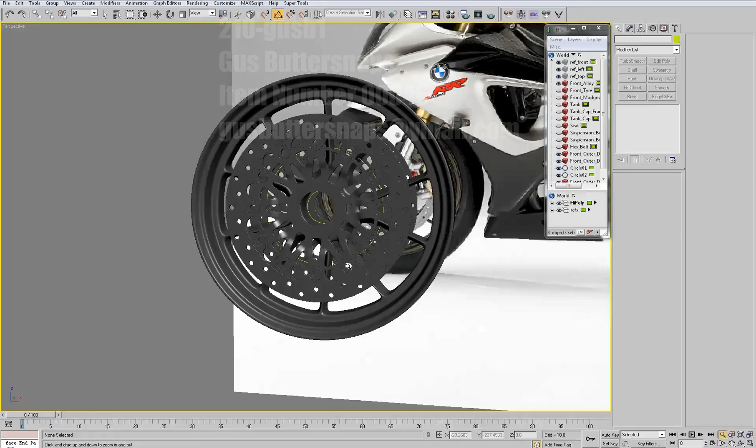I really wasn't entirely happy with the curve we put in this piece in the last section, so I'm just going to go back and do it a bit more to my liking. We'll take it back to the starting form that we had, so just delete everything but the original piece, and we'll use the symmetries again.

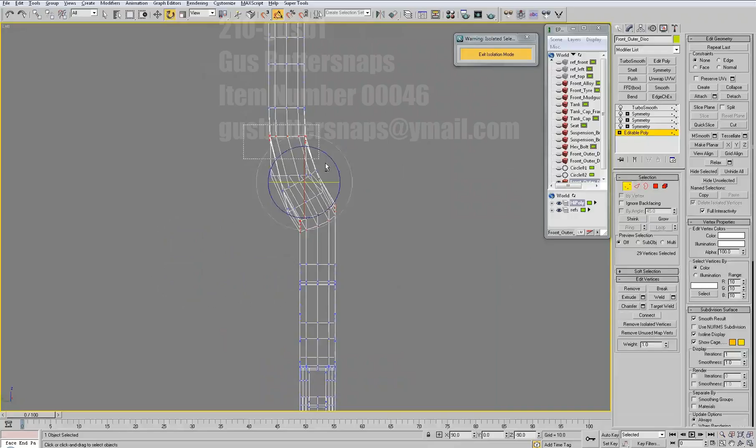Instead of trying to randomly guess the slant that we're putting on this, I'm just going to use a quick box as a reference. That way we know the slant that we make is perfectly straight.

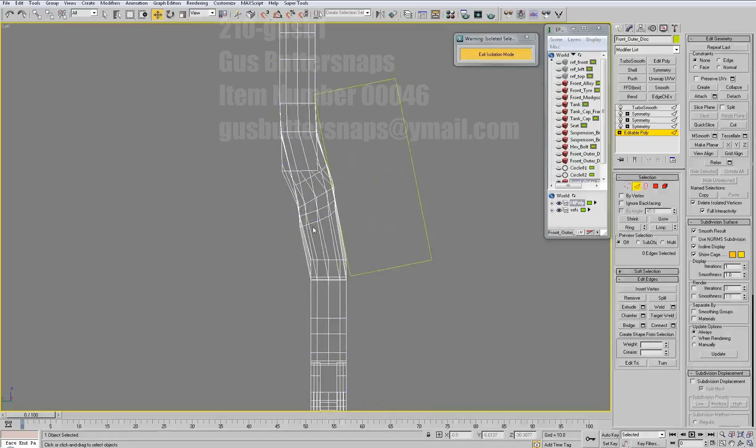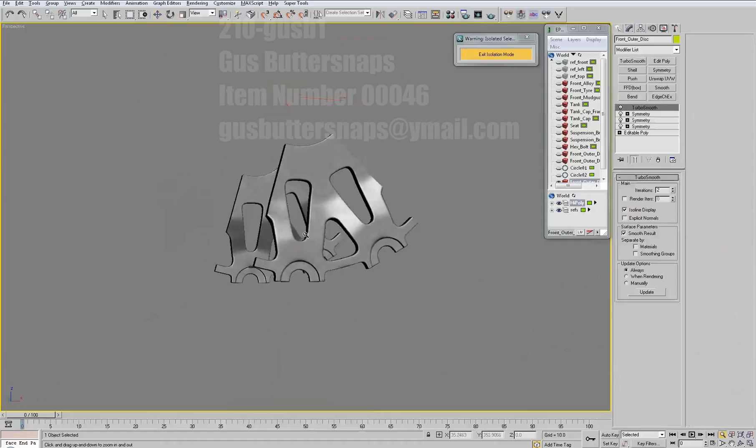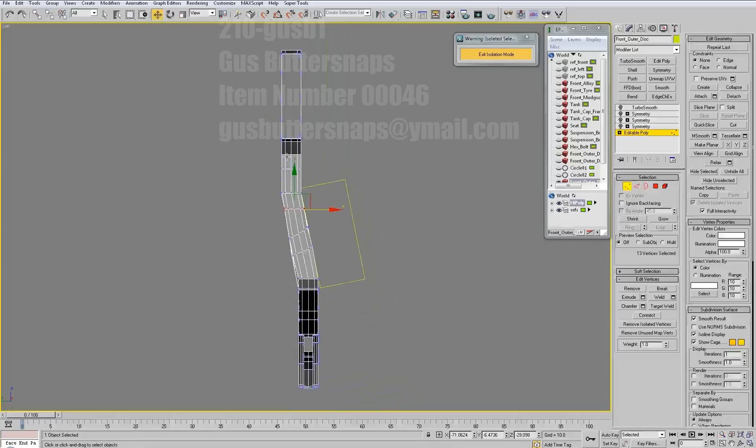Starting to look a little better, but still need a bit more work. Just gonna make this slant a bit deeper.

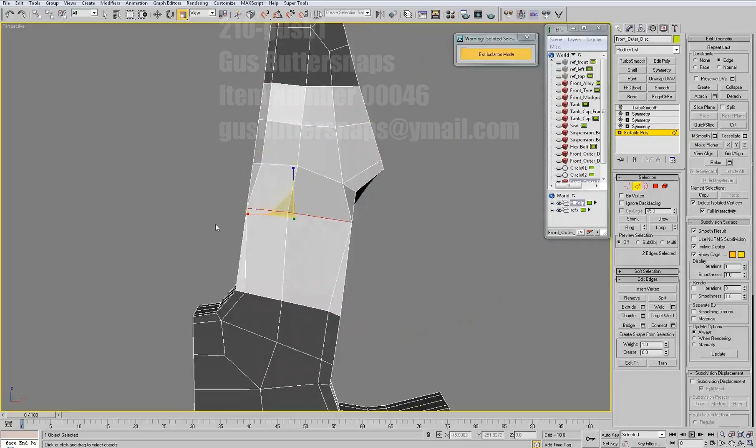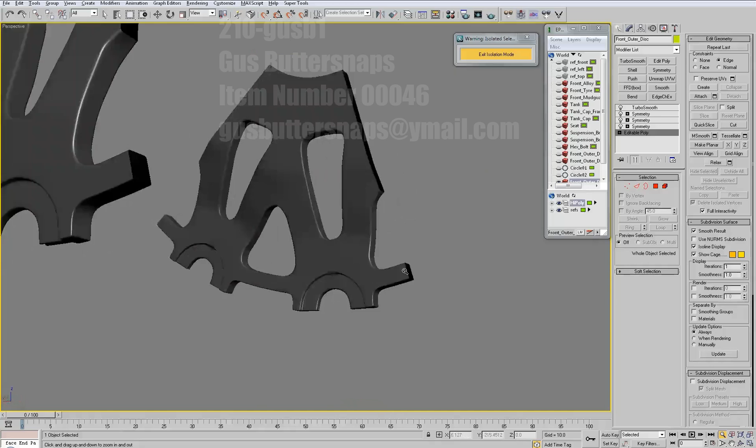Thinking about it, the easiest solution for this would probably be to delete the back faces, and then you can just work with a single plane. If you cut it off, you can probably just use a shell to do the thickness again, and then just weld it up. Obviously that didn't come across my mind while I was doing this, so we'll just go for this random approach. We get to the same point in the end, so it's just whatever works really.

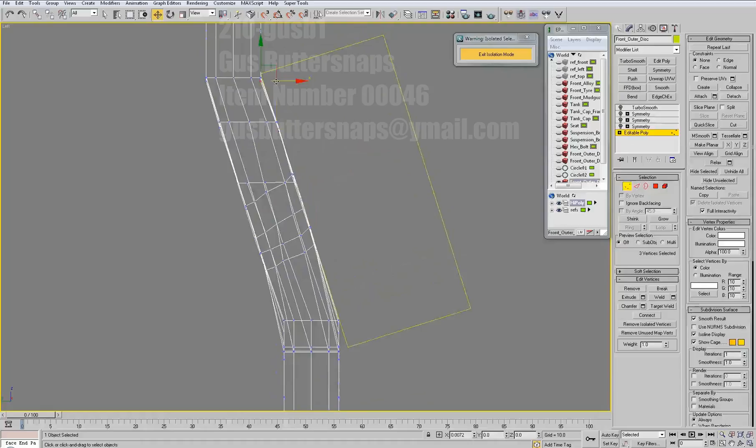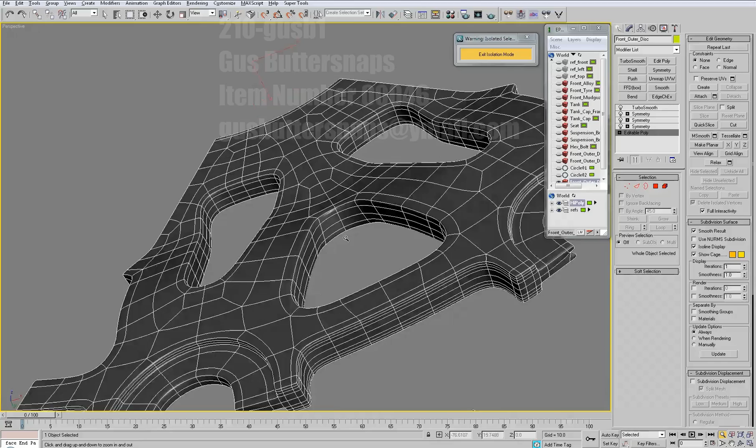It's looking a little better each time. Still a bit of a dip in the middle, which I need to try and sort out. I think I ended up going through pretty much every single method trying to flatten this little piece out.

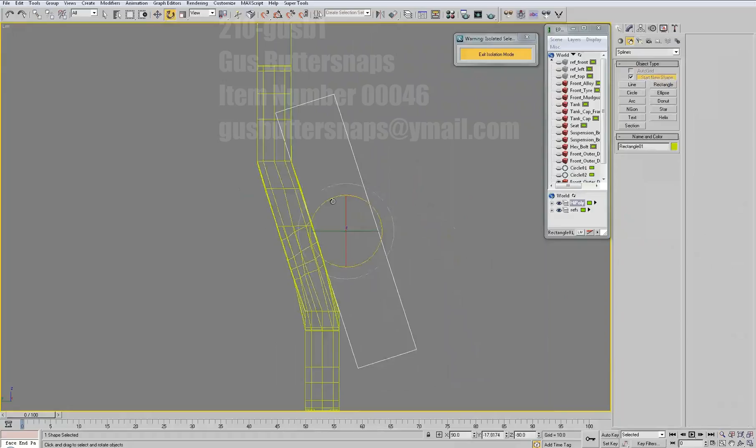I think with that dip I can just move the verts up in the middle and it would have sorted out, but for some reason we're just going to make the slope a bit longer.

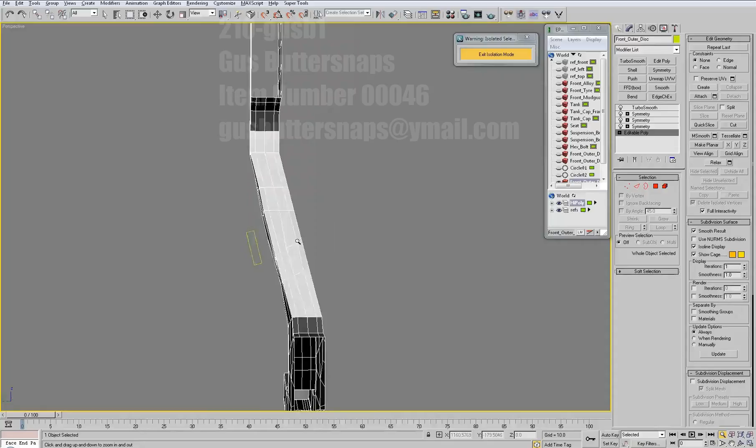So even if there wasn't a dip in the mesh like there is anyway, the way we chamfered that edge would have caused an error, even if it was flat. So basically curved off an edge right where the crease meets the bottom. So basically we're just going to chamfer for this piece to get the extra edge, and that way, by continuing the loops straight up, that should remove any problems that we should have.

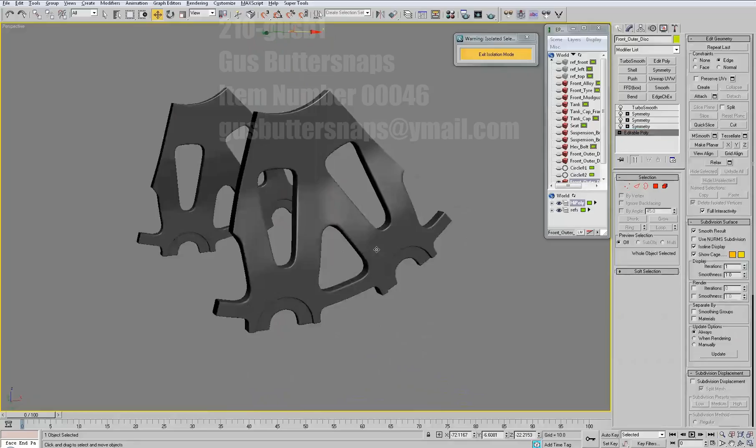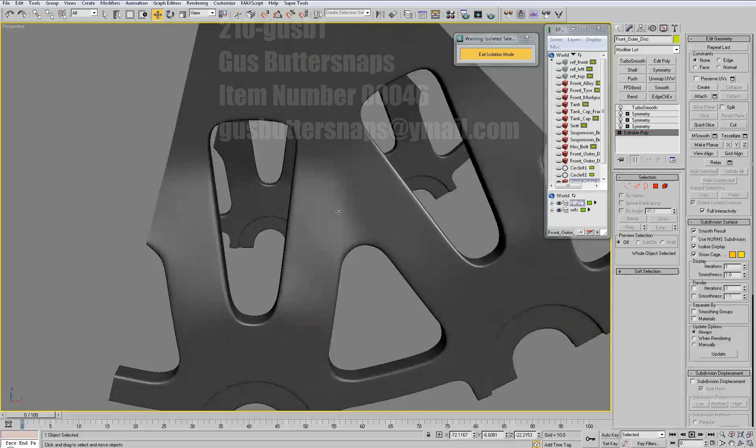There's still a little dent in the middle, which I was all kinds of confused by at the time. Whee! So we got there in the end.

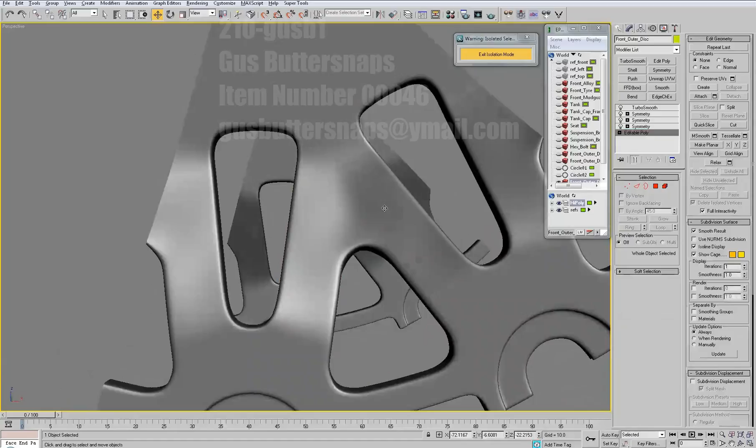There's a bit of skewing on the other side because of the angle we put these verts at as well, so we're just going to have to sort that out. Basically just more poly pushing until it's all smooth.

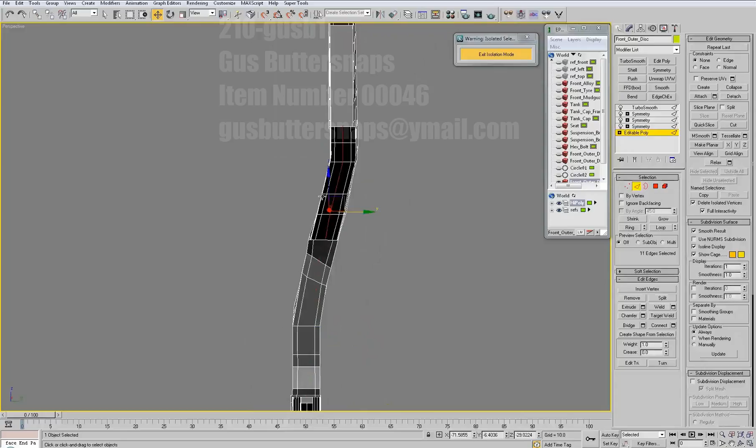Yeah, so we didn't have any edge loops at the bottom, but upon about to add in these, I realised the bottom's not even welded up. So we'll just fix this up.

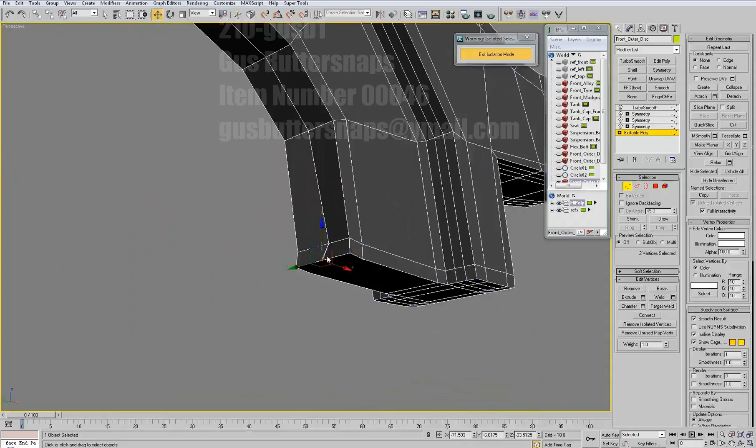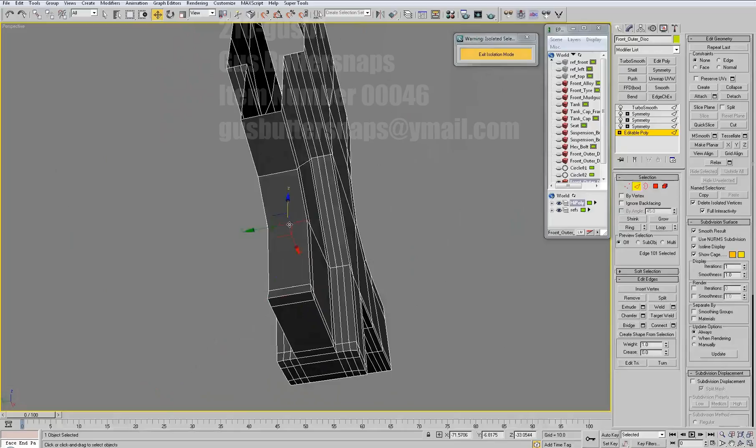So there's some all kinds of crazy twisted polys down there. Basically just selecting edges using bridge there, and we'll just add our loops back in.

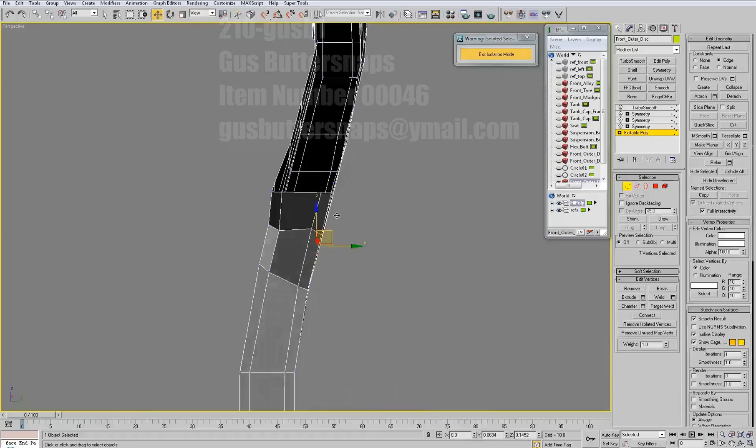To stop the slight distortion in the shape, we just need to line these up. So that will make sure the curve's the same on the front and back side of the piece.

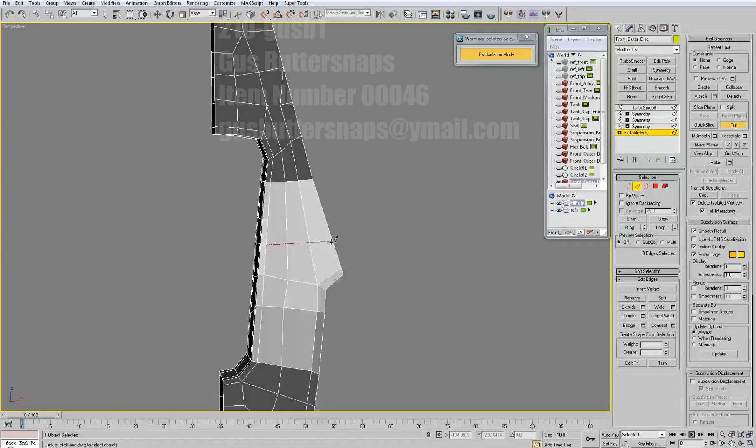By deleting the edge and putting back in, it should make sure that it's straight.

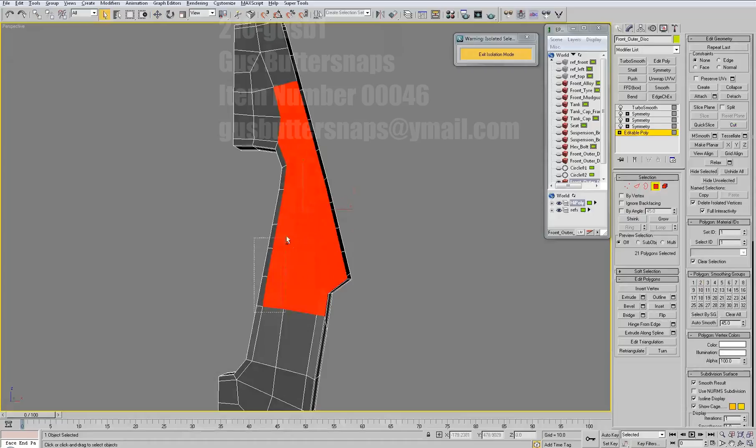Instead of redoing the topology on the back, we'll just use what we've already got. And we can just pull it back and weld it all up. Go back and do clone to element.

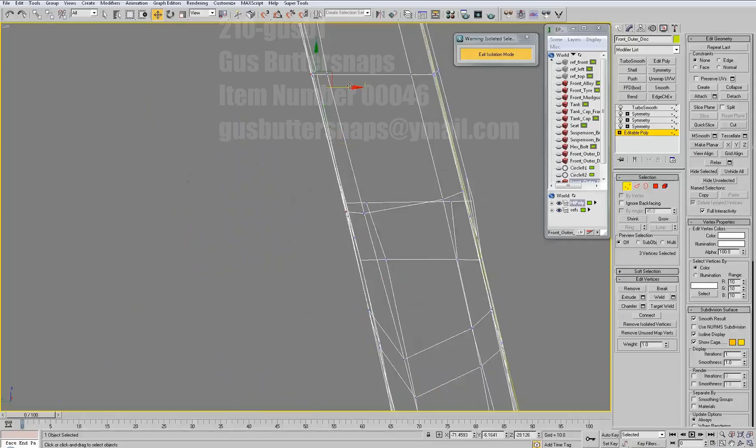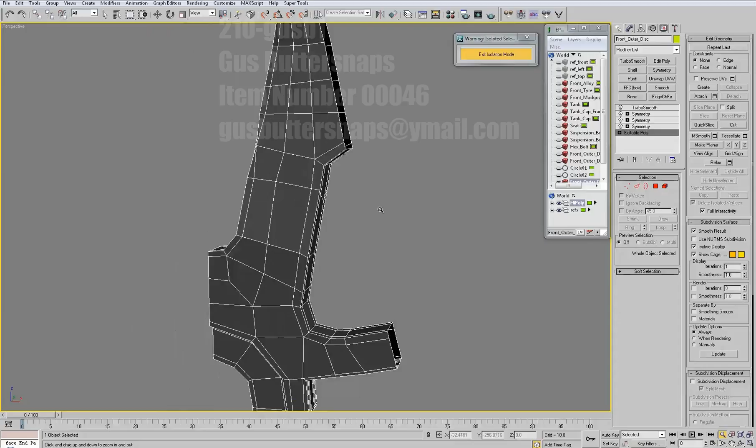Yeah, slowly getting there. Basically accidentally welded these up, so just move that back and recut them in.

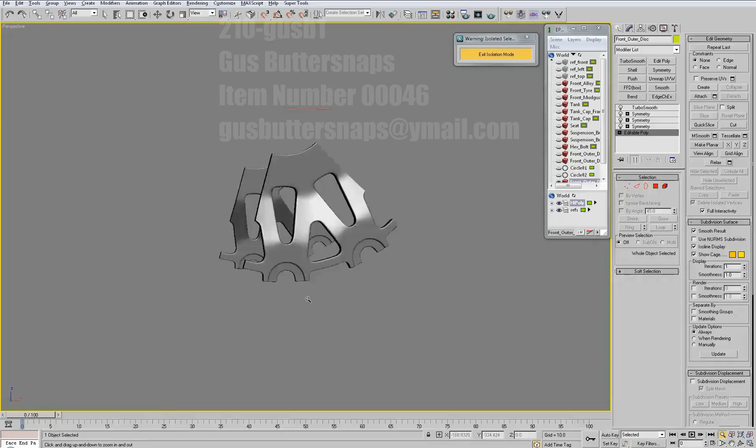Cool, so shape's looking a lot better, so we'll just copy this round again.

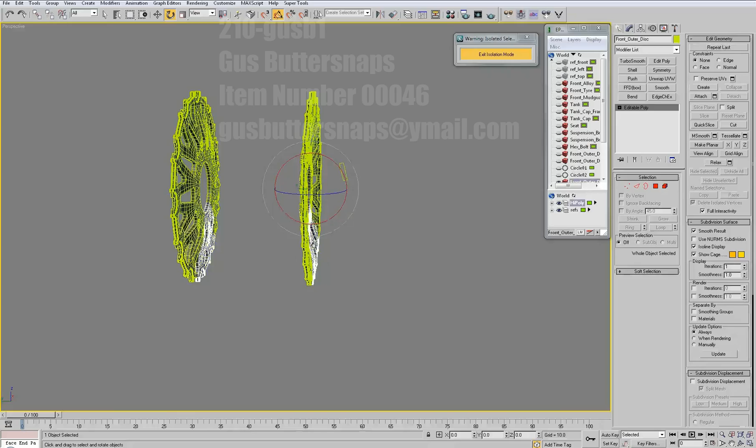So we want just the one going round instead of all of them. So again, just attach them all and then make sure you weld them all together. Careful of the threshold that you don't weld up all your edge loops and that.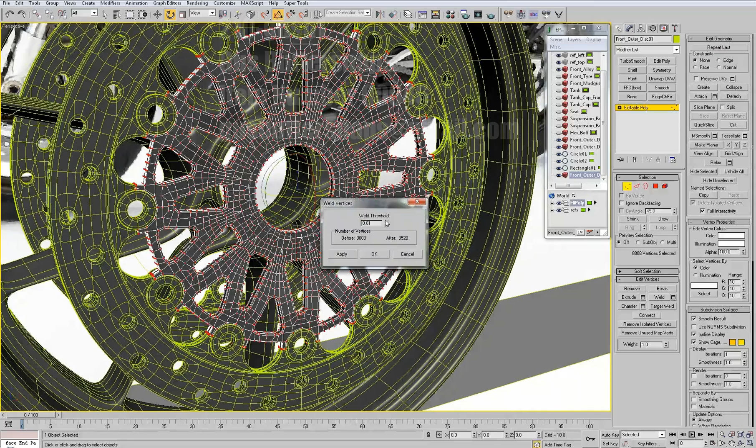Yeah, we just need to sort out all these triangles. So we'll just delete all these middle edges and then collapse all the loops.

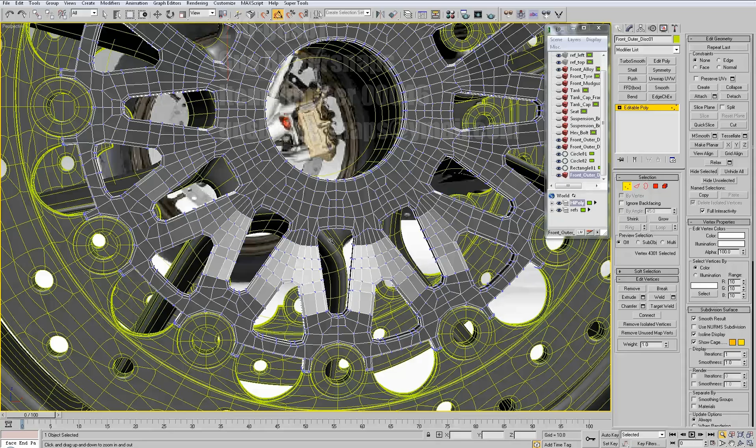Looking good. So just do the same again on the other side as well. Because there's loads of stuff in the way, it's easier just to do it in isolation mode.

And now the piece is done, we'll just do the X-form reset. Add the turbo smooth back on. And then we'll just do the symmetry again.

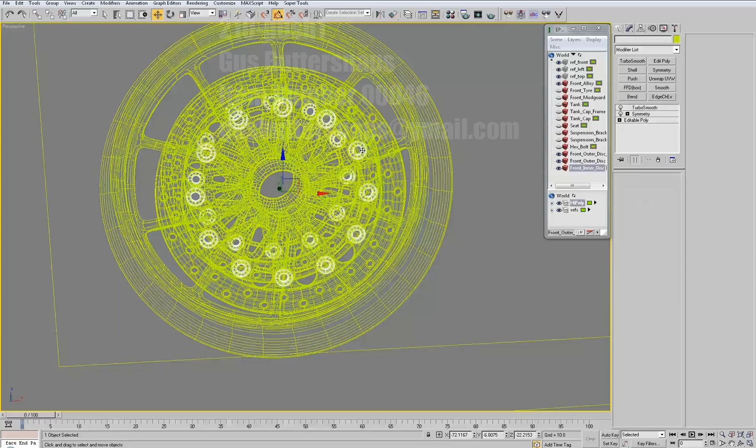Okie doke. Now that piece is done, we'll just get on and do the bolts that are in the middle of the disc. Yeah, they're standard hex bolts with a rounded base.

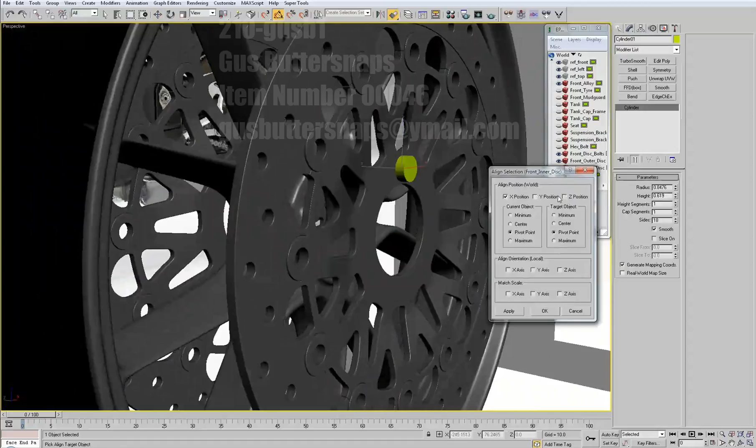Basically just align it to make sure it's in the middle. We'll just go with 16 sides again, because that's what we had for our last hex bolt.

So we'll just leave the bottom open, because you're not ever going to see it. As long as you've got the edge loop in there to curve the bottom edge. And we'll just use the move and scale tools to sort out the base.

So just cap that to make a flat surface, and then we'll put the hex bolt on there, and make sure it's aligned to the middle.

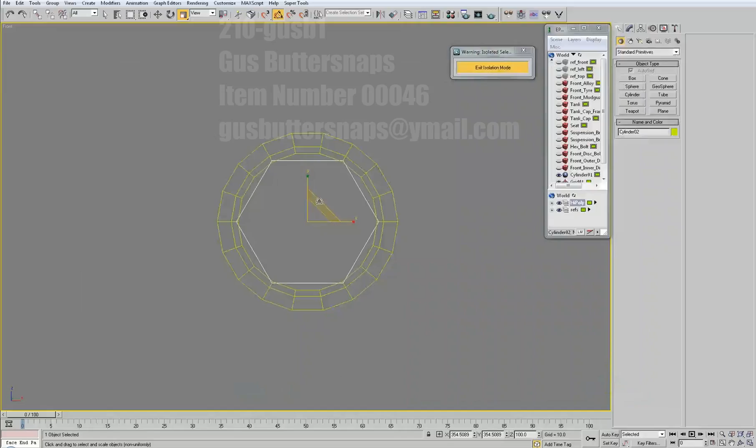So again, we just grow, delete, and then flip the bottom face. And just target weld the corners.

Basically just do little cuts on the corners for our edge loops. And we'll just do a symmetry for the bottom half.

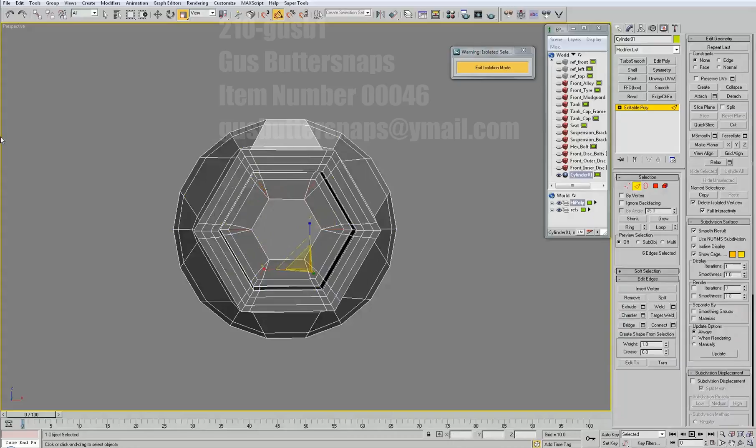Just collapse all these, delete the middle edge. And just cap off and quad the bottom. Just use Turbo Smooth to have a look at what we've done.

There is a bit of pinching on the outer ring. We're just going to try and limit it as much as possible, by scaling these in. If you want to make it pinch free, then literally just make it with a bunch more edges.

So if you want detail like this, essentially it's a hard edge on the side of a kind of dome shape. So you do need more edges if you want it without any errors.

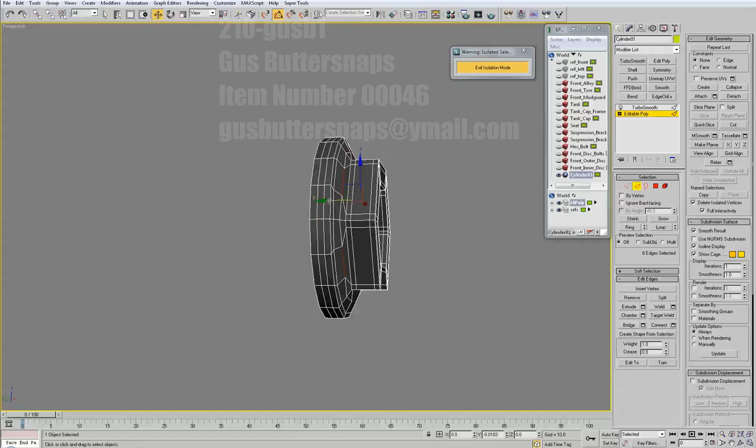But the size of this piece, I don't think we're too fussed. I wasn't at the time anyway. You just try and limit it as much as you can, so it's not too apparent. It's not nearly as noticeable as it was now.

You'd ideally want another 1 or 2 edges in between each of the flat surfaces. That should get rid of any pinching there is at all. As I said, we'll just roll with this.

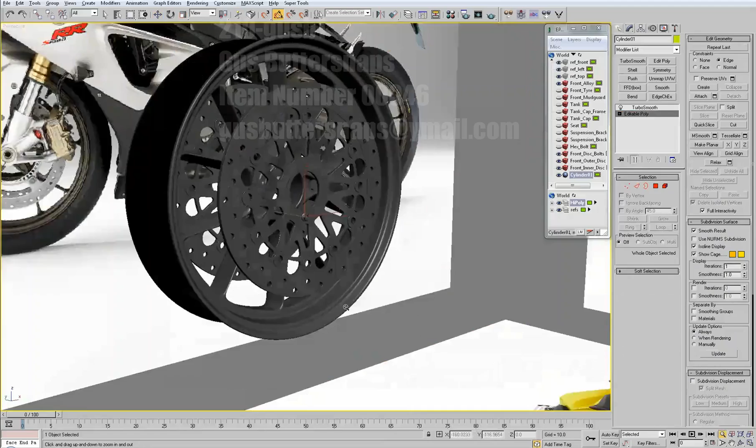Just going to make the base a little bit thicker.

Basically just using this shrink command. It's right next to grow, just above the ring and loop. Again, I've got that on a hotkey, so just mashing a button.

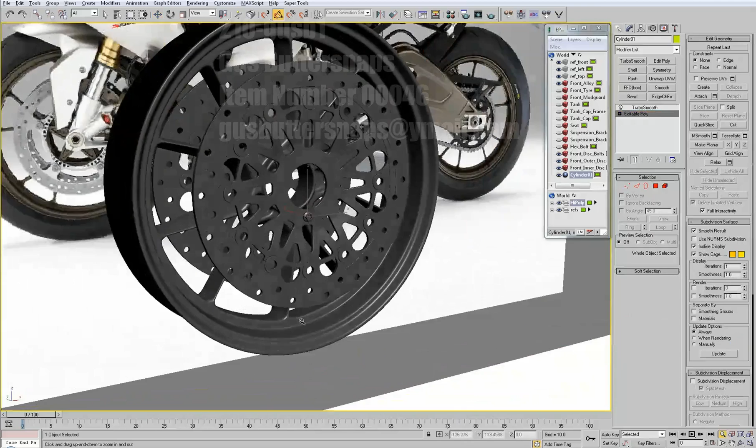I think that will do.

Basically making a circular array here, so before we do that, we'll just collapse and do the XForm, and then for the circular array you just align the pivot point to the circular part you're doing it for.

And then I'll count how many clones you need, and just shift drag it around. It's as simple as that, really.

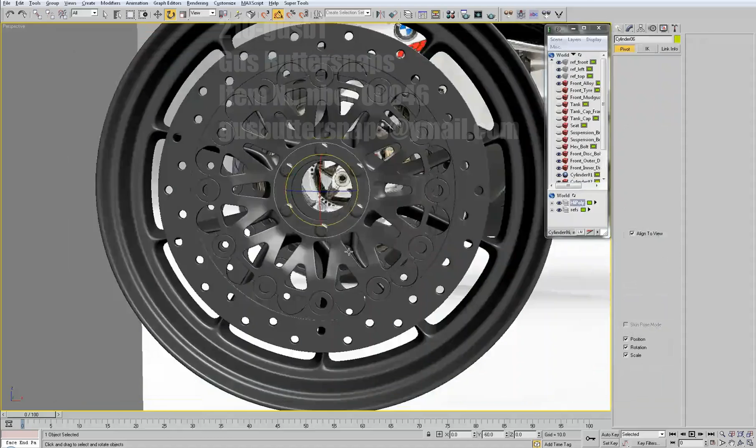So basically just attach them all together and add the turbo smooth.

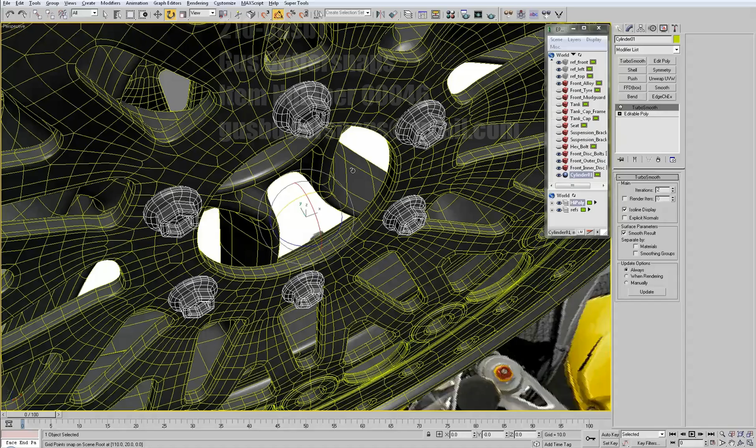It's usually advisable when you're doing stuff like that to go in and individually rotate them a bit, and it gives a bit of randomness to your bolts. Because most people will point that out if all your bolts are facing the same way.

So again, we've finished the piece, so we'll just give it a name. And then we'll just add the final symmetry onto the other side so it's matching up.